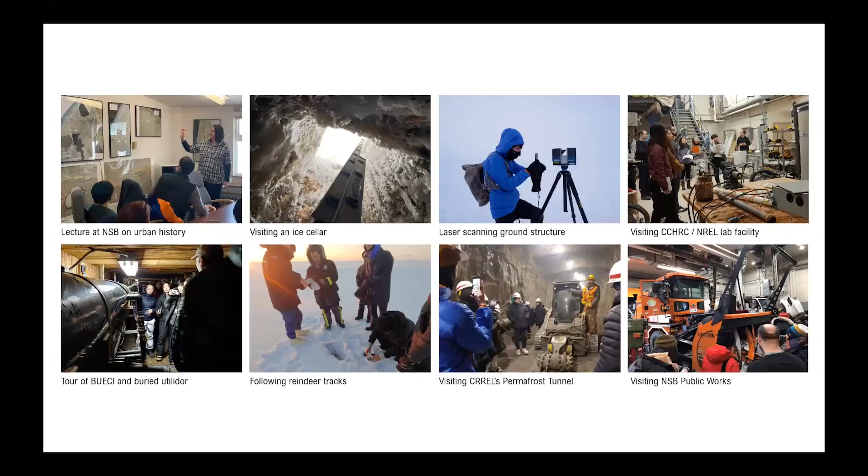Over the years we've been working with NSB, TNHA, and various other organizations, including now the Department of Public Works, to understand the context in which the city functions and the challenges it's facing, and importantly, having students bring their curiosity into the conversation to question practices currently underway.

The first thing to frame a perspective for the project is to understand this is Utqiaġvik in the wintertime, and these are basically the conditions underground: we have ice-rich permafrost.

This is the CRREL tunnel in Fairbanks, which we take our students to—CRREL has been very generous in bringing us to understand and see these large ice lenses down in the ground in this silt typology. It's a fascinating place to understand the binary between the surface and the ground.

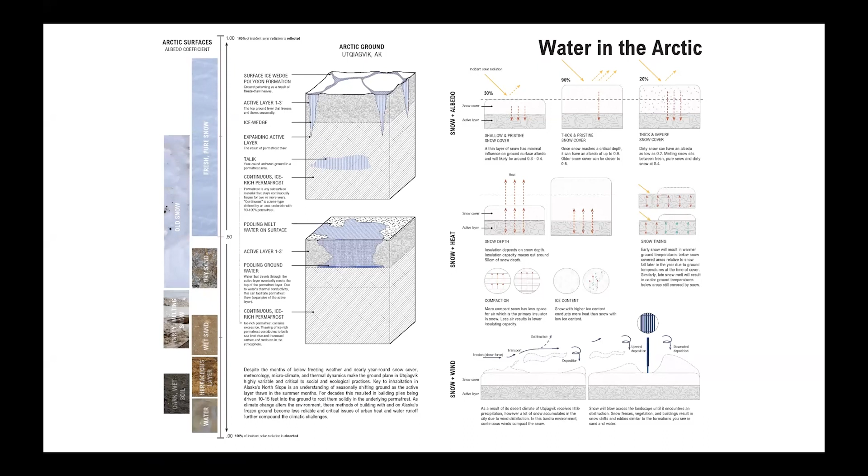And the essential part—Kevin, I'm glad you're talking about this in detail—is the essential nature of water within the Arctic in controlling and determining the stability of permafrost, which is the fundamental issue at stake. Water in its various forms, from liquid to vapor to snow in different states. That's the essential part, as Torre Jorgenson drilled into our heads many years ago in talks in Fairbanks.

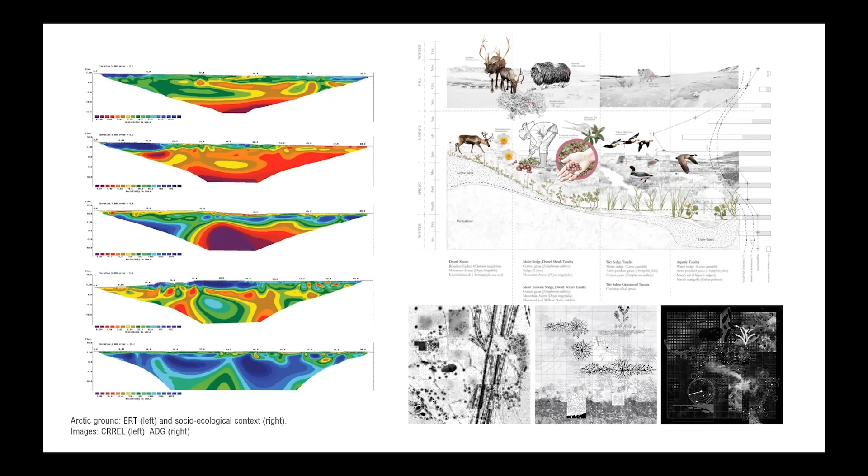Design, again I'll underscore, isn't about solving technical problems, it's about looking at the cultural and social value of design. It's both, yes, I would say it's both.

So this is Utqiaġvik, and we're going to show you, we've got basically four key sites: TNHA, which is a 29-plex housing; BUECI, which is BUECI headquarters, the main utility; the hospital, SSMH, Samuel Simmonds Memorial Hospital; and also BEO, a control site outside of town.

We're just focusing on TNHA. We've got a number of micro-met stations, terrestrial ground moisture and temperature probes, as well as geophysical measurements—resistivity and GPR—beneath TNHA.

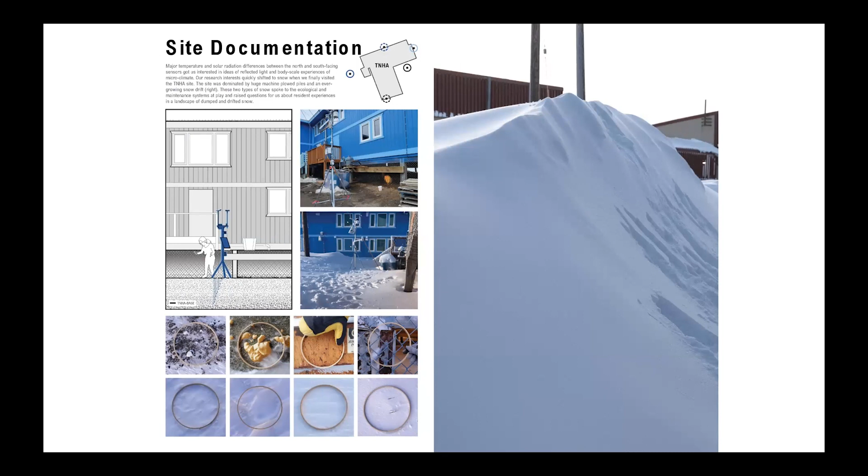What's also interesting is seeing the different ways snow accumulates around the building through natural drifting. This happens in this courtyard, from the west. We've been modeling the location of natural drifting, but also the maintenance practices, where snow is actually plowed and pushed in the city. Maintenance is the essential actor here.

As Kevin was mentioning, this is a great lead up to what we're looking at as designers: how do we begin to think about maintenance as an essential design tool, not only in terms of preserving and maintaining ground conditions, but also in terms of how people might move within a landscape that's being maintained so heavily during the winter, during spring breakup.

Just to say a few things - the red piles are machine piled snow piles, and the green is the naturally drifted snow. The one on the left top corner is 20-foot high, measured last March. The one on the right, the red pile, is about 12-foot high, and the naturally drifted snow we measured at 8 feet.

These are pretty significant sizes that have potential to change the ground thermal regime, as well as impacting the physical accessibility of people, as well as views from the indoors of the houses, which is in the middle.

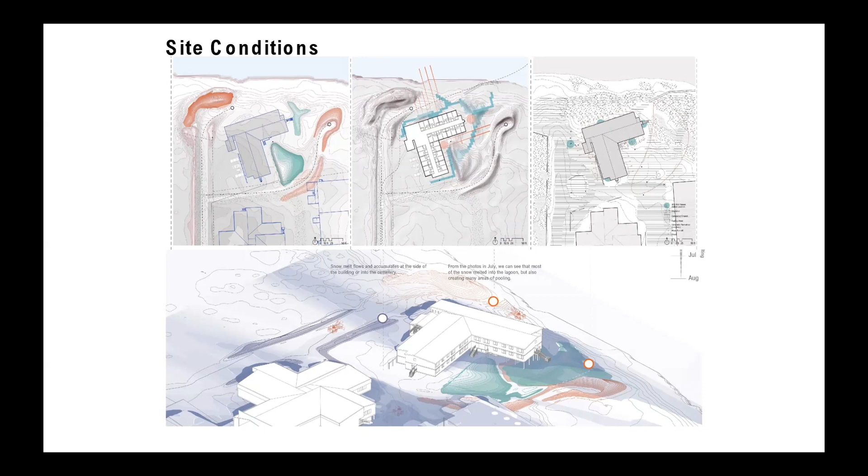Go to the next one. As Matthew was saying, we were looking at different ways the public works use their equipment and locally available resources to work with this snow and the meltwater process.

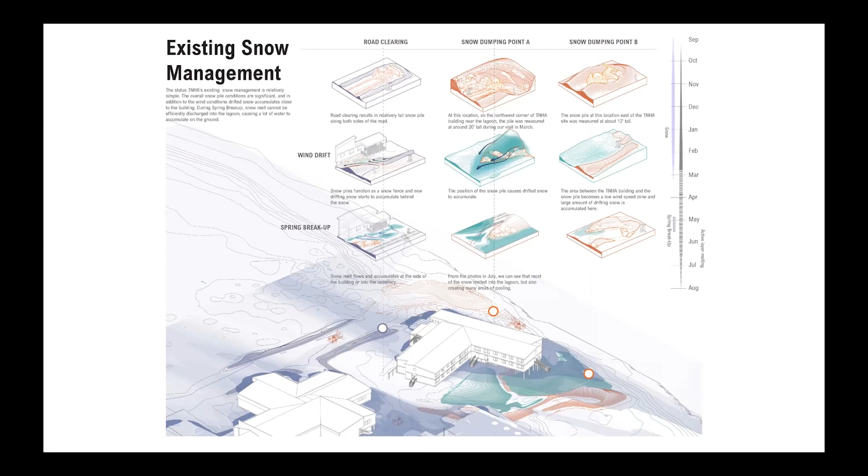If you think about it, go to the next one - the series of these different tools they already have in their stock, from front loaders to their customized road graders, are in a way tools for permafrost preservation potentially, by minimizing or being able to minimize permafrost degradation.

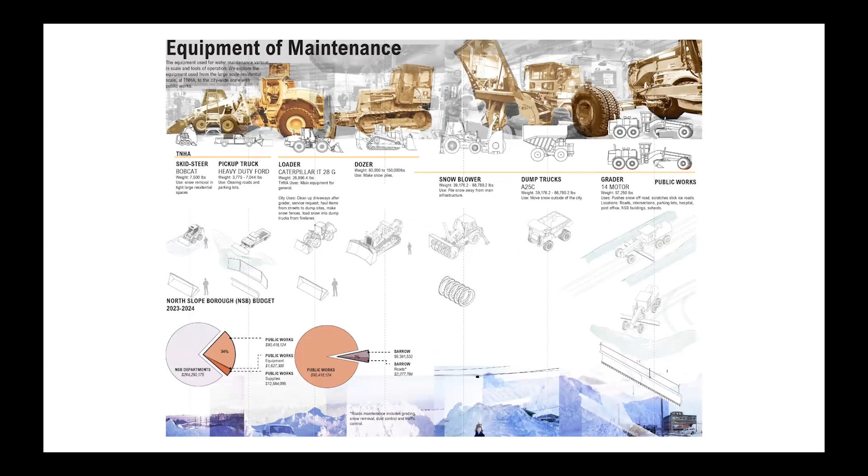Next one. Some things we've been thinking about is how we can expand the maintenance regime by thinking about, back to what Kevin was saying, how the snow piles they make can be smaller so it reduces or doesn't interfere with insulating capacity of the snow, therefore making the ground colder.

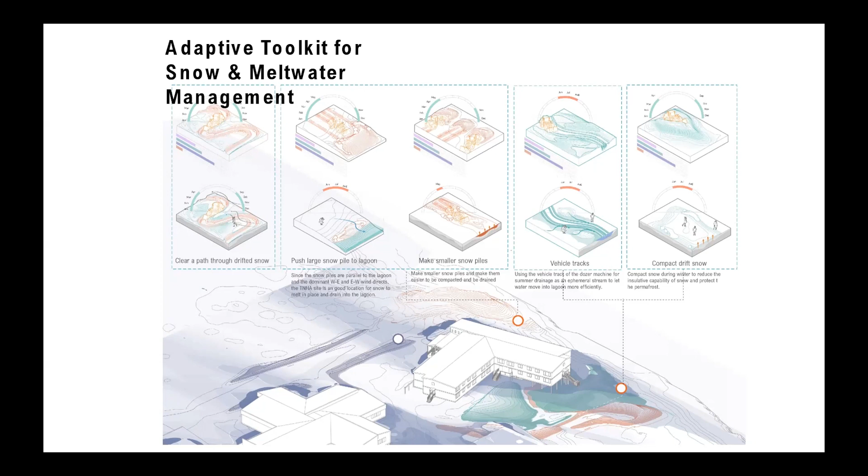If it's going to be bigger piles of snow, as in the second column, push it all the way towards the lagoons, so the meltwater is not draining towards the foundation of the building, for example. These are some of the things we've been thinking about along with our students.

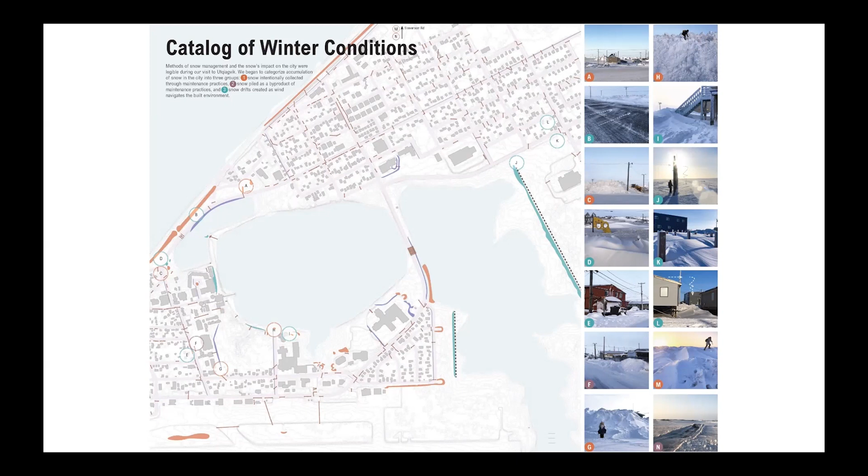In the urban scale, what you see in the orange short lines are the locations of all the existing culverts. If you expand all of these at the urban scale, placing the snow dump sites in with where the drainage sites are...

Go to the next one - at the bottom, a three-dimensional view of the city shows how the site-specific conditions, as well as the uses from housing to schoolyard to playground and so on, can begin to bring a better coordinated strategy for maintaining snow, as well as its impact on the ground, as well as the social implications.

In a way, thinking about scraping the ground clear, allowing cold air temperature in the wintertime to overfreeze the ground, and then compacting snow, changing its thermal properties, is an essential tool that can be used in terms of mediating ground conditions and permafrost stability.

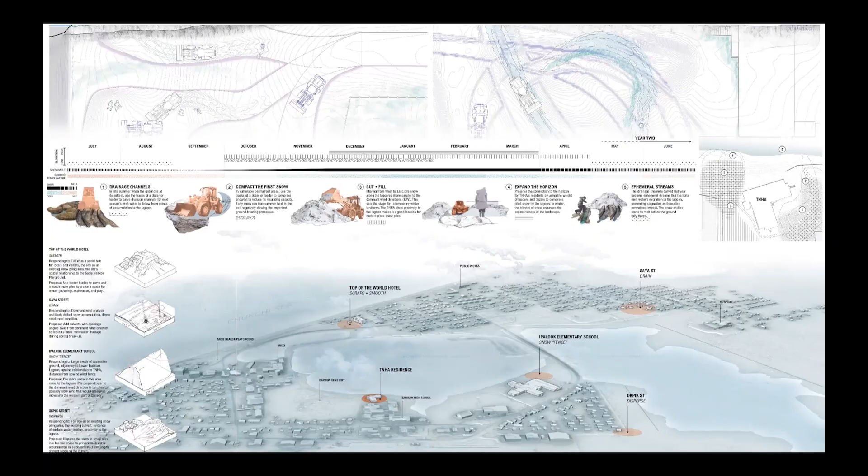Going on to the hospital site, we're going to jump through here, looking at some of the sensor locations we have - again, micromet stations, ground temperature probes, as well as geophysical measurements that are underway.

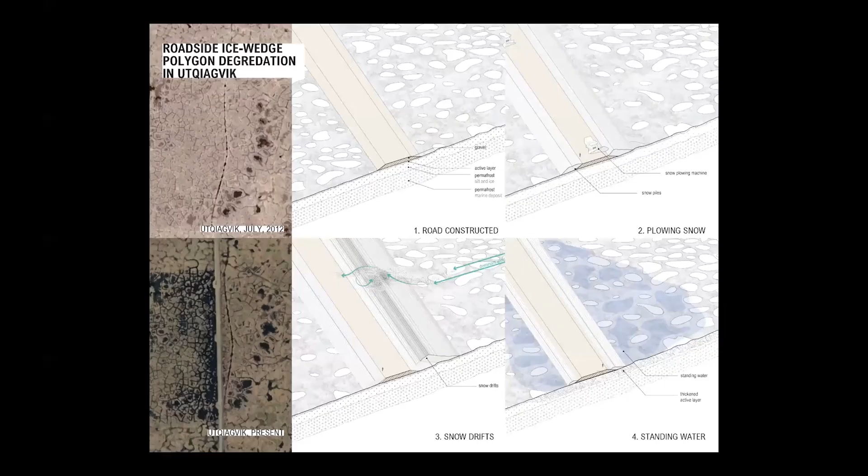What's weird about the BO, the hospital site, is this is built in a bowl, and so water accumulates in this bowl - it's plowed, and so it's a big problem for them. We've been working with ASNA to actually look at ways to remediate the situation.

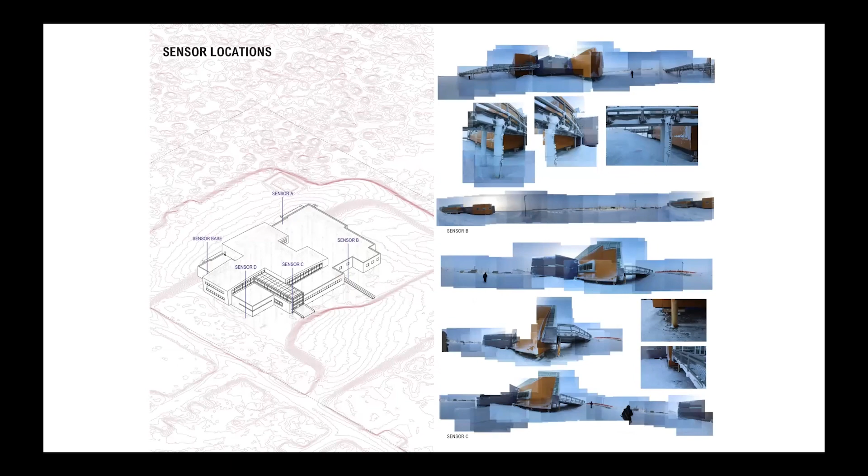But also importantly is to think about ways that it can activate the space as well, not just solving a problem of drainage. The other thing that's interesting here, just as a footnote, is looking at the impact of a road, where the introduction of a road and then drifting and snow accumulation creates increased degradation of permafrost through increased snow and melting, and what that does in terms of the energy balance of the surface.

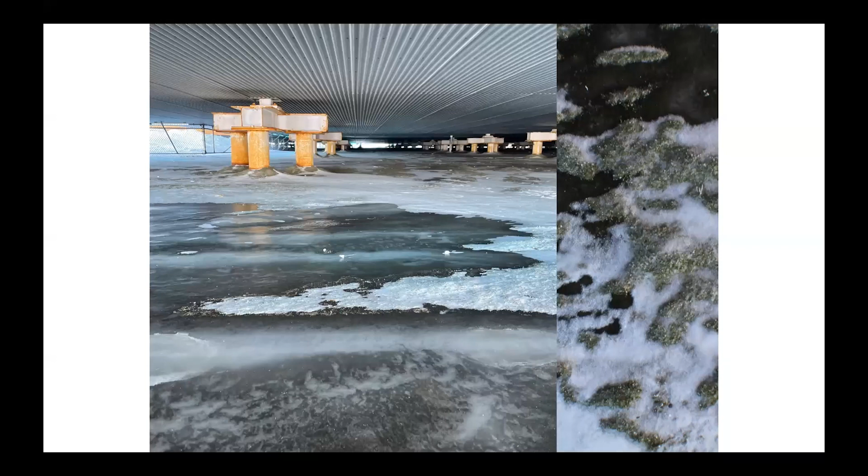Underneath a hospital, you're seeing also a lot of accumulated water. So what we did with our students is we looked at an existing site plan for the hospital on the left here. It's super dense. I don't expect you to read it.

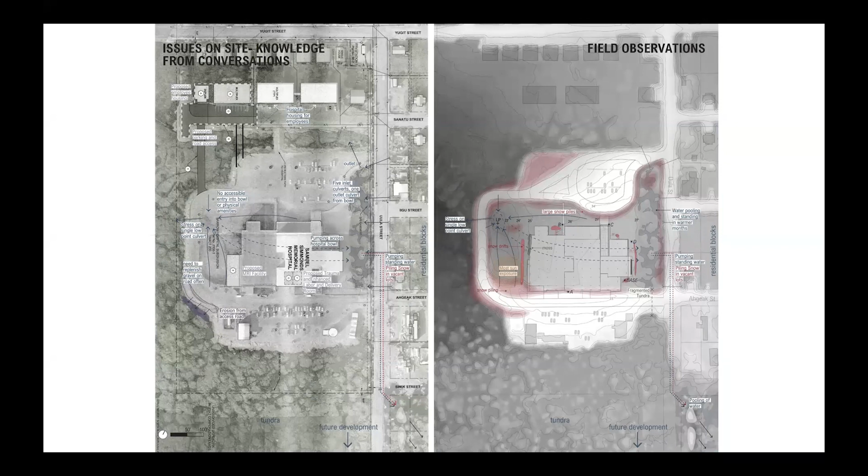They pointed out a number of issues that were of concern, and we began to do some analysis, looking at studying the site, understanding where snow is accumulating and thinking there's a drainage problem here, but there's also a problem in terms of the hospital being a central role in the town, yet there's no way to actually engage other than going inside.

And so what we did is start to think about, okay, let's look at, first of all, the drainage problem. This is just modeling surface drainage. And then look at how we can think about activating the space around the hospital for people, but at the same time also solving this drainage problem.

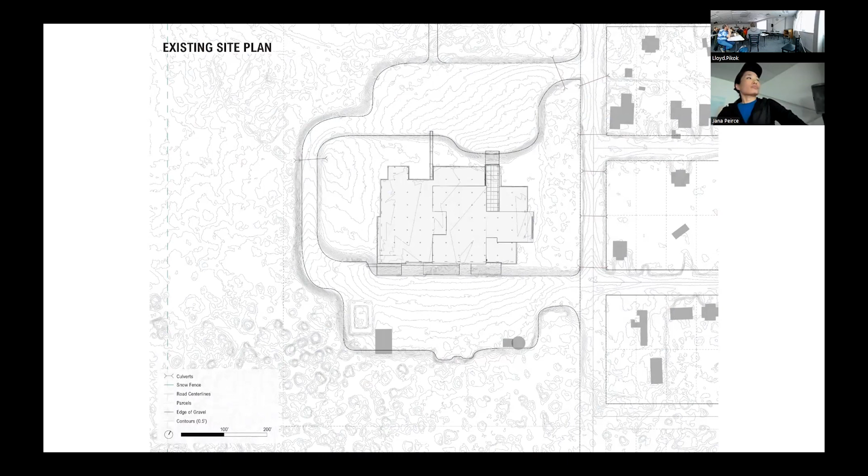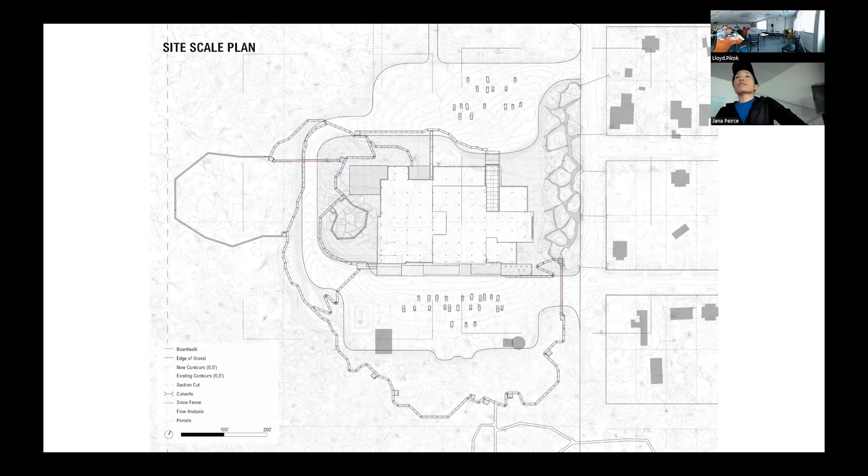So what we did is actually start to look at programmatically thinking about a path and a trail and gardens that actually become health and well-being, which is what they wanted. And so we began to think of that as a way to link what's going on in the interior to the exterior spaces.

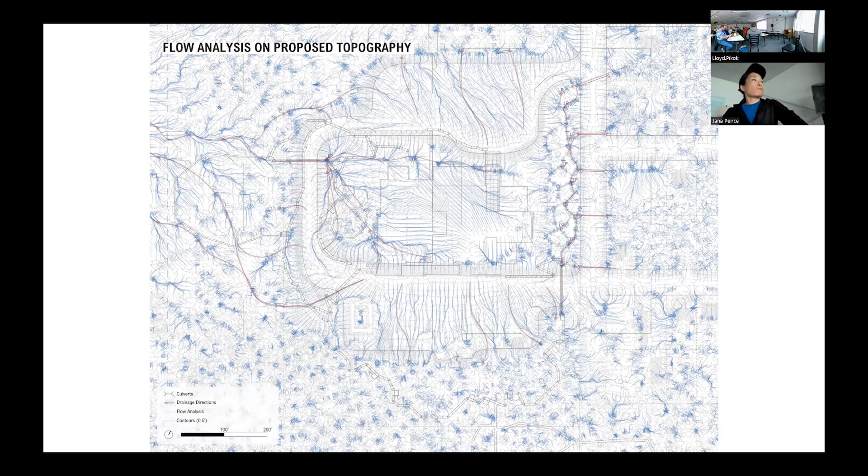And so that then changed the drainage pattern on the ground because those paths are actually controlling where water is flowing. You can see a more focused drainage compared to the early one. And then thinking about the design of the path itself as a kind of key activation element. So that's zooming through it super fast, but you should get an idea of what we're trying to do.

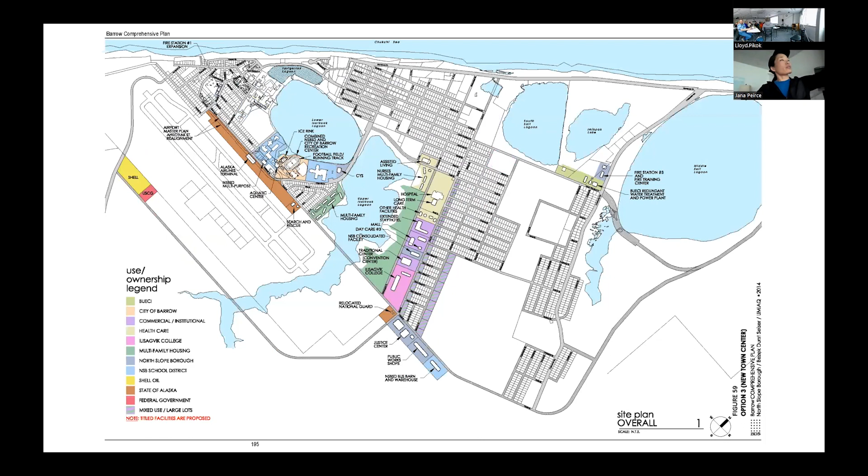This is just from the comprehensive plan of Utqiaġvik. This is the future expansion of Utqiaġvik. So we know where the hospital is -- the hospital's here.

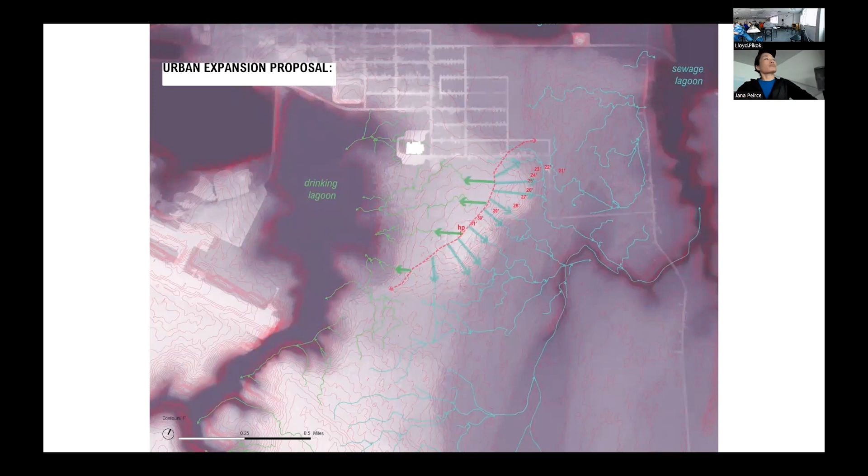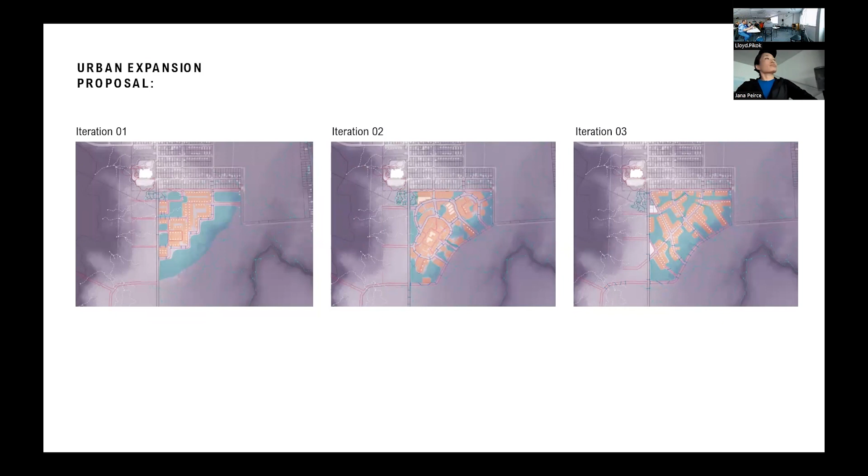And what we did is shift the frame of the image, started looking at the grade topography of the site, looking at drainage, looking at where the watersheds are, and also looking at how water would flow in that area, and thinking instead of just continuing with a linear rectilinear sort of planning strategy, why not think about a planning strategy that may conform more to the natural drainage patterns of the tundra itself.

The last thing we will talk about briefly is our approach to architecture and design in general in buildings. This is a drawing that explains the systems at work in a building, thinking about human interactions as well as energy and other functional technical aspects.

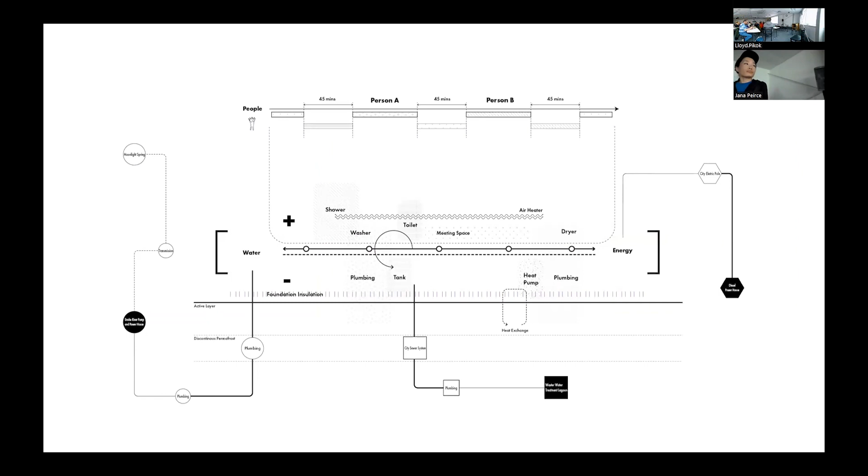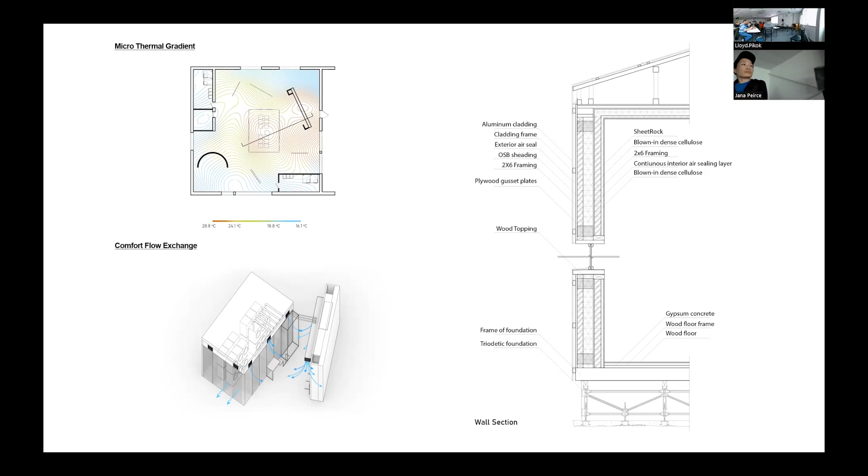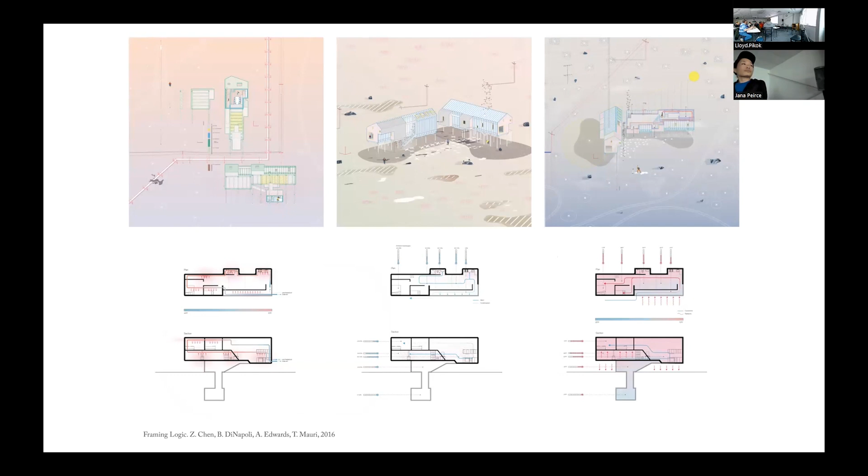And so, when we start to draw plans and sections of buildings, we think about not only the energy balance, but also the way in which people are actually catalyzing the usage of space. This is a house that was designed that shows thermal and vapor pressure conditions as well as thermal conditions within the house, but also the spaces for living and a kind of engagement.

I'm thinking, how do we create homes that are actually spaces that people want to be in, that prioritize the use and cultural needs that they have, as well as solving the technical and engineering challenges that exist.

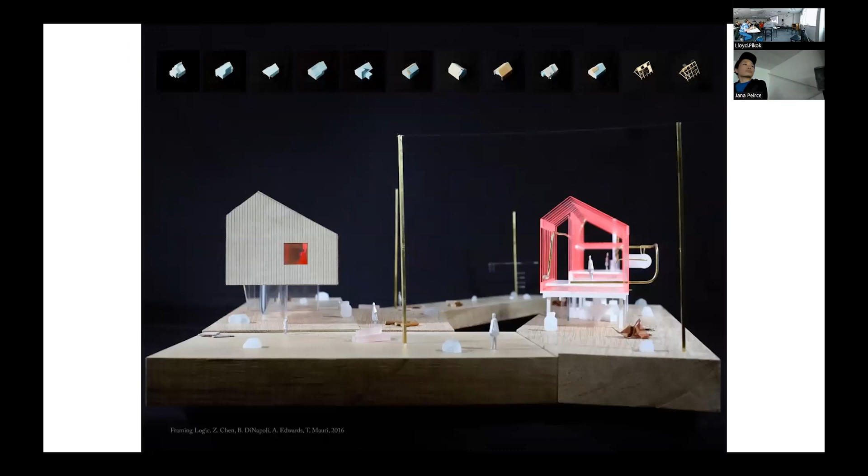So just to wrap up, this is a summary of what maybe defines our approach. What is essential, we believe, is coupling of Arctic landscape and built environment. Those two things need to be understood to understand the challenges of global climate change.

We really believe that there's an imperative at the moment to question design conventions that are usually imported from temperate latitudes. But also importantly, what happens in the Arctic is that oftentimes, because of logistical challenges, the designs produced for housing and other structures prioritize overcoming logistical and economic challenges as opposed to designing spaces for the people occupying those spaces, which is very different.

Collaboration is an essential part of bringing action-oriented changes to people and communities in the North. And cultural and social benefit is of equal or greater importance -- this is really important -- cultural and social benefit is of equal or greater importance to technological innovation for the built environment. Hands down, make a building less efficient, make it better and healthier for the people living there.

I think that's a great idea. I'll end there. Thank you.